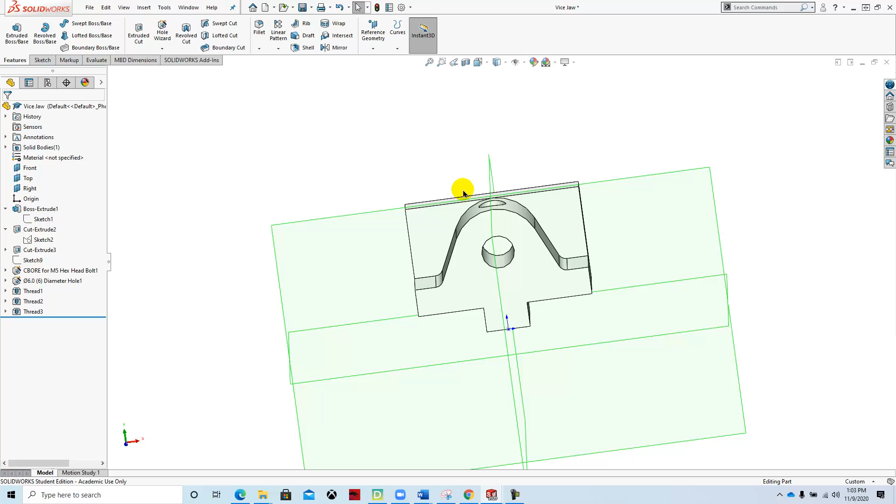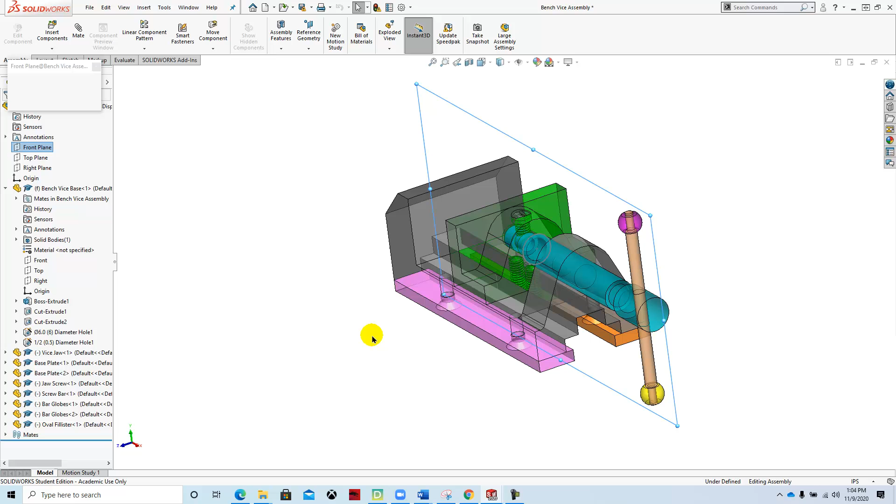We want to try to keep these axes or planes lined up so that when we get into the assembly model, if we take a look at how the planes are set up, you can see the part is modeled right down the center. That's one of the reasons manufacturers like SolidWorks so much, it has these design intents which allow designers to make things as perfect as possible.

If we look at how this part was created, we can use what I call the wayback bar. It's this bar right here, and you'll see that if you hover over it, it turns into a little hand. If you pull that hand up through the tree, it'll show you how this part was created.

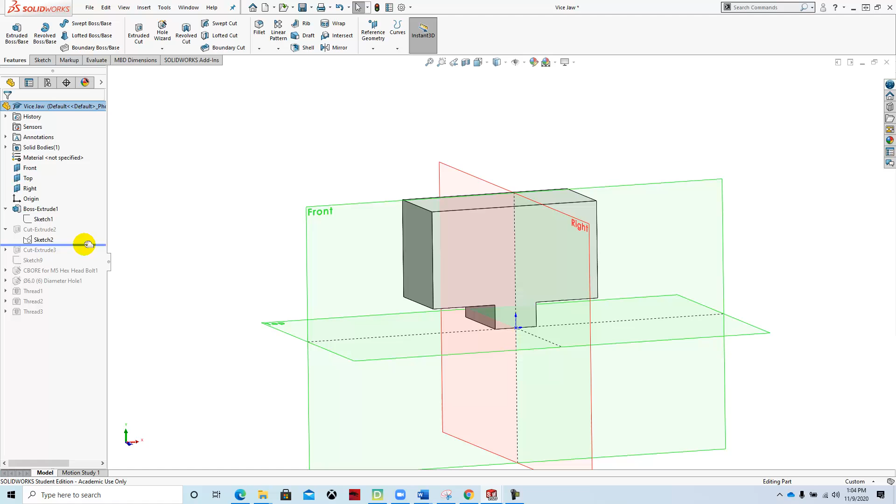It was created from a sketch that was the basic shape of this part, which is 64 millimeters by 36, plus another 9 by 16 for this little part down here. I made a few small changes to it. What I found was that the next step, and I'll talk about those changes as we get to them, is to model this component.

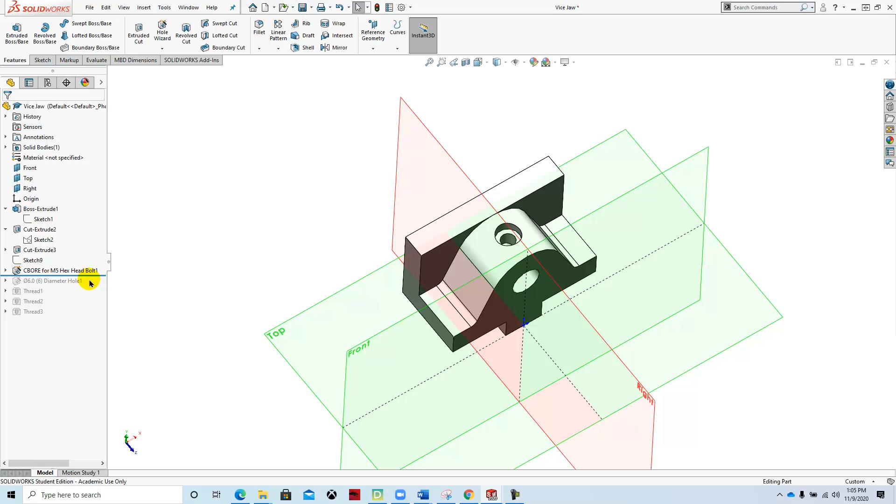You can see we modeled this feature right here and cut it, then the hole here, the counterbore with the M5 hex head bolt, and then the 6 millimeter cutout here.

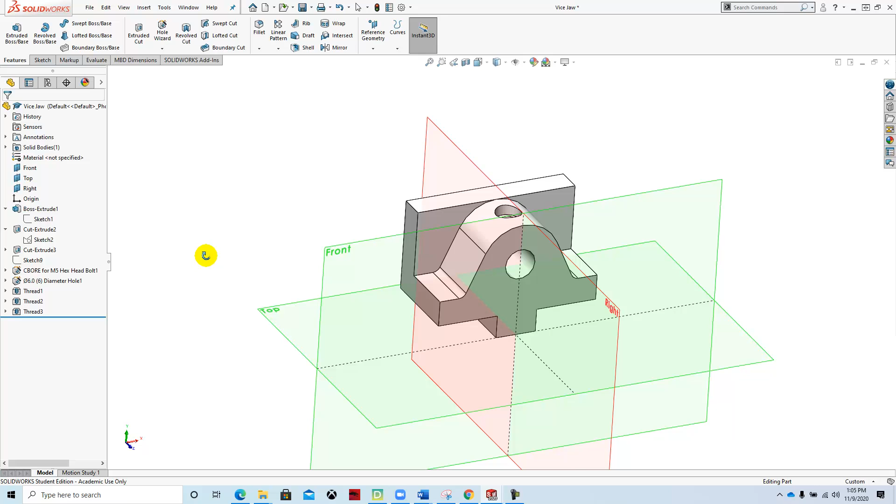Then I tweaked this a little bit by threading this with a 1/4-20 tap. Now, if I was going to manufacture this, I would use millimeters, but it's hard for me to get metric fasteners. It's a lot easier for me to go down to Ace Hardware and get a standard imperial size, so I just made these 1/4-20 for our purposes.

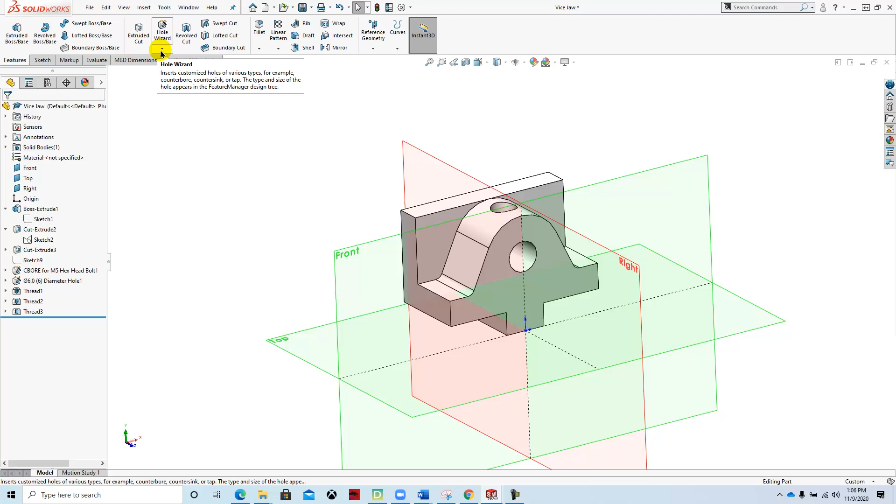I also put two threaded holes on the bottom here that were 1/4-20, because if we create it according to the way the curriculum was written, we'd have to use self-tapping screws. We could do that, but since we have this hole wizard now, or I think they should call it the thread wizard, we can see how the 3D printed threads will work.

Okay, so that's how this part was created. Let's get started and make that part.

If we take a look at the blueprints here, we can start off on the front plane with a sketch, and we're going to sketch this basic 64 by 36 shape with this 16 by 9 little T down here at the bottom.

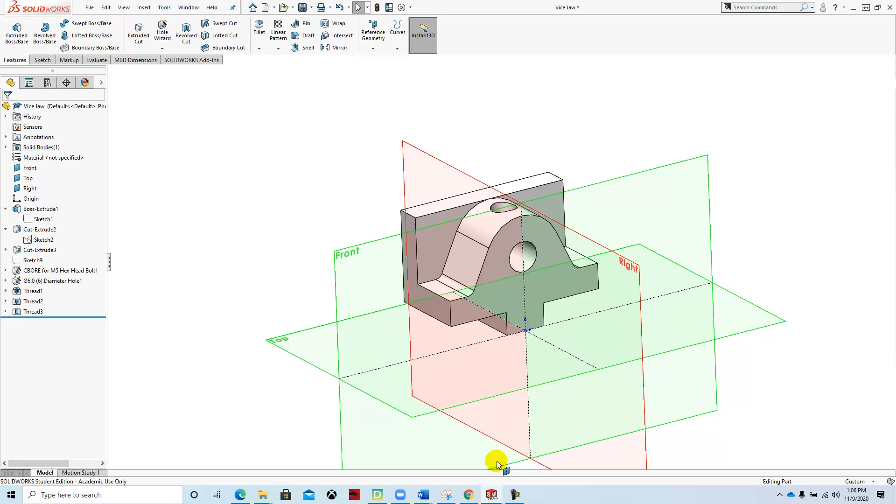Switching back to SolidWorks: File, New, Part. Front plane, start a sketch. We're going to model it on the front plane, and when we model that, we're going to model it right along the center line, so we're going to create a center line.

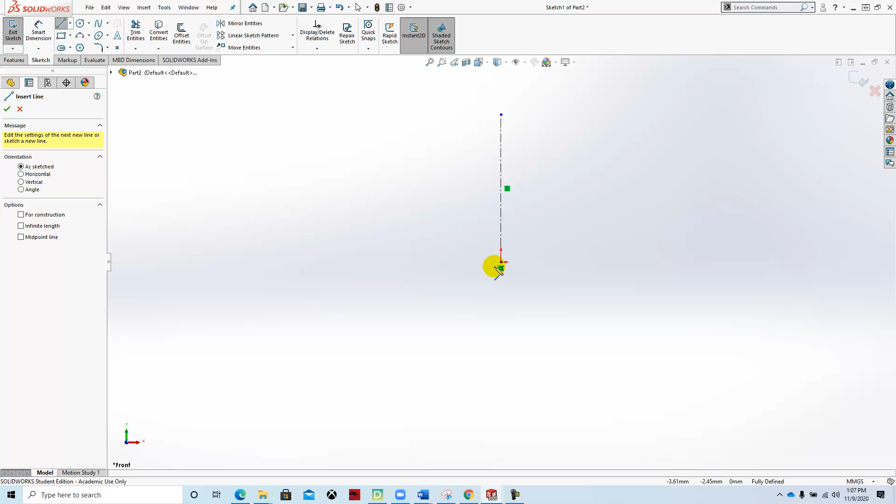Now, I forgot to make the units millimeters, so I'm going to switch that over to metric, and then we're going to continue the sketch. Sometimes it likes to be difficult. So I'm going to create half of it, and then I'm going to mirror it, because SolidWorks likes symmetrical relationships.

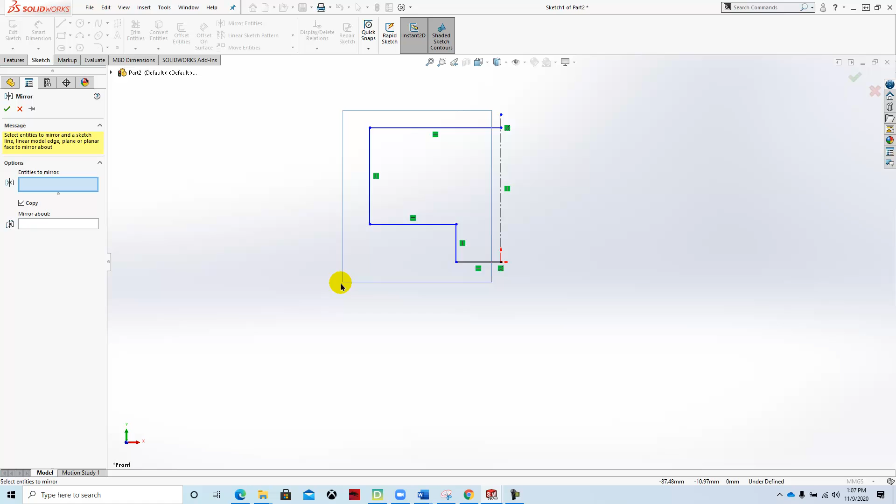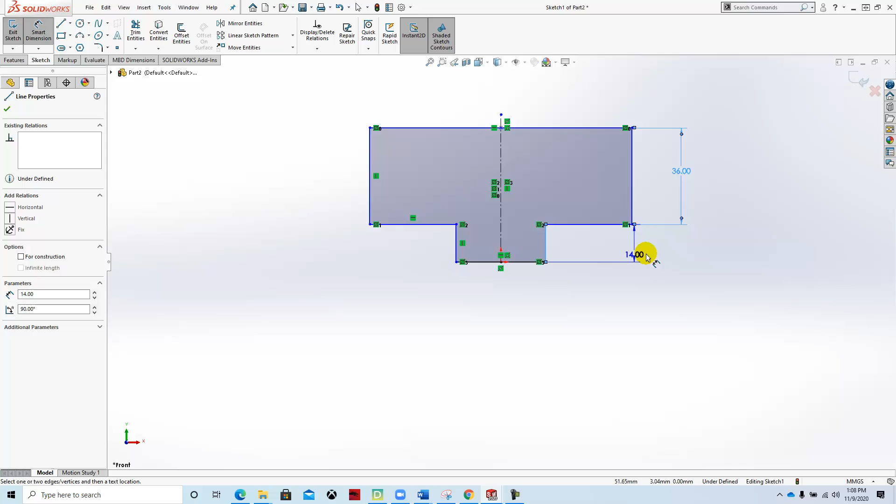Then I'm going to start to define my dimensions: 36, 9, 16, and 64.

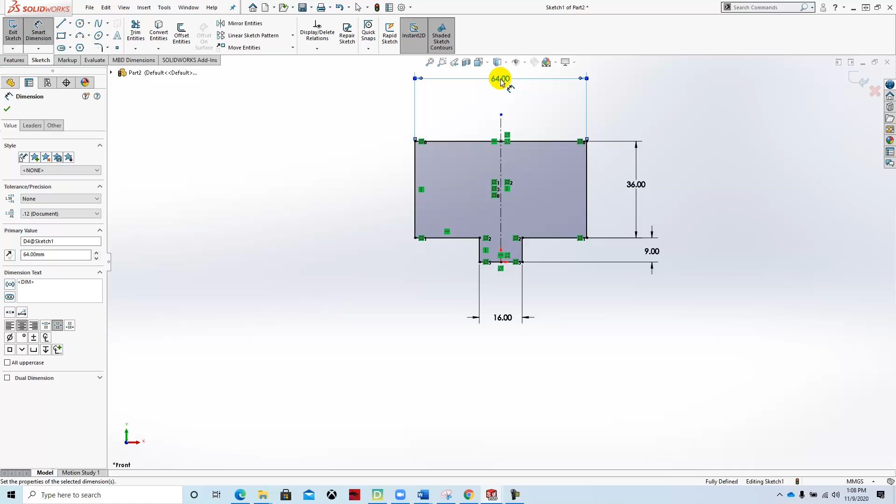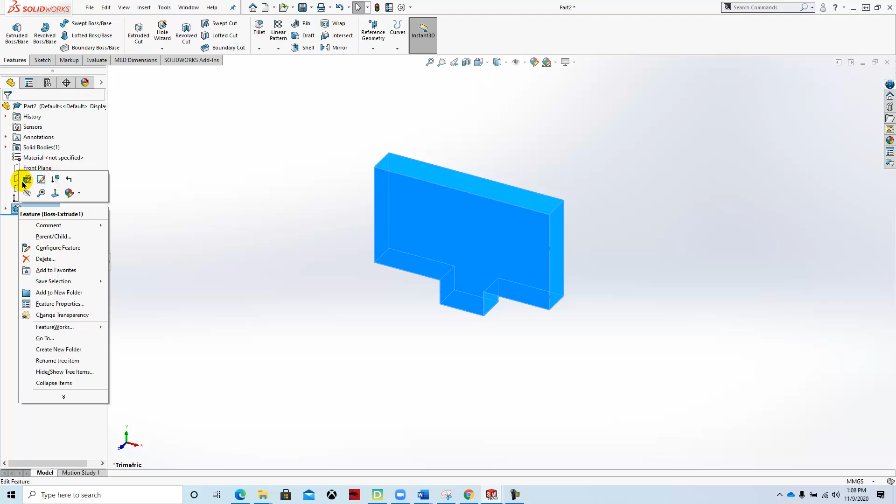We're going to extrude that sketch, keeping the face of the part in the front, and extrude it at a distance of 32 millimeters. Something happened there, so I'm going to edit the feature... 32. There we go.

All right, so that's the first part. Next, we're going to sketch on this face here and create this shape right here. Again, we're going to create a symmetrical shape which we're going to mirror, drawing half of it, mirroring it, and then subtracting this part here and this part here.

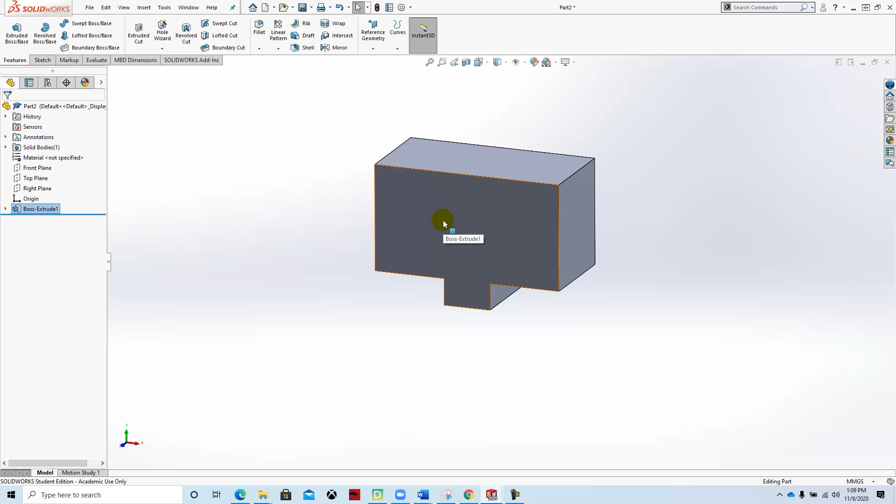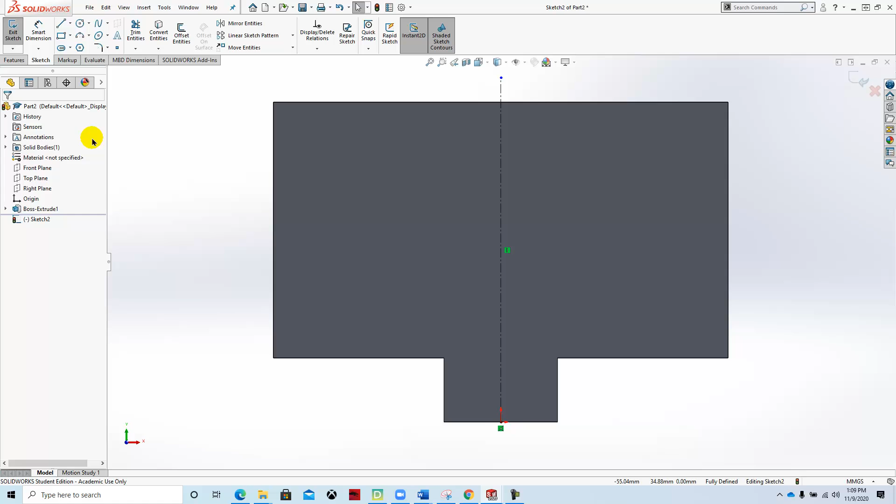Click on the face, select sketch, space bar, normal to. Sketch, construction line, vertical right up the center. Circle from here to this point. I'm not sure why it doesn't... there we go, to that point right there. That's going to be a 16 millimeter radius.

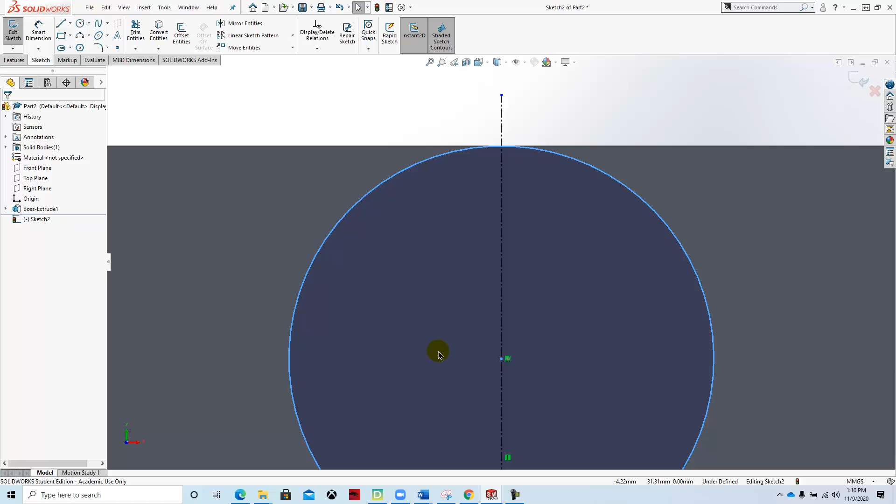Or 32 diameter. I'm not sure why it's fighting me today, but it's not unusual. So what I want to do is add a relation to keep that component tangent with that part.

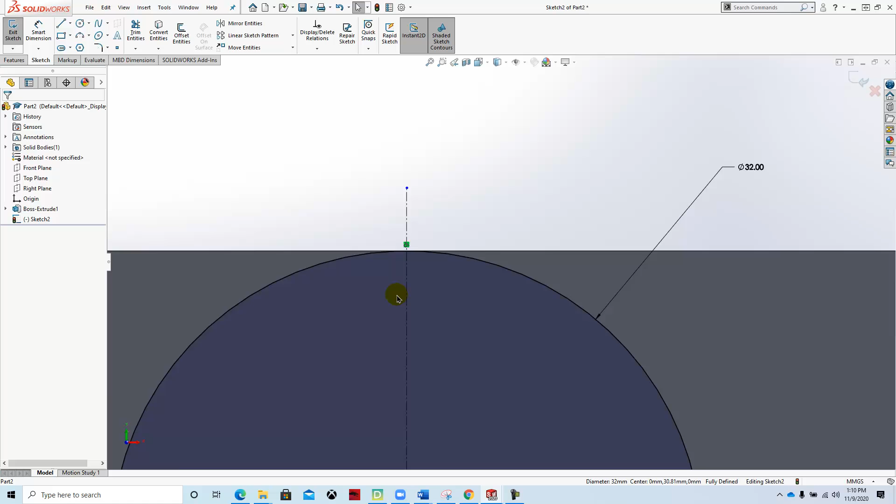So what I'm going to do is see if I can add a relationship here between this and this, and I'm going to say tangent. However you do that, it's fine, but we do want that geometry set like that.

We'll put another line here on the side. It should be horizontal. And then we'll set that at, we'll trim that. Whoops.

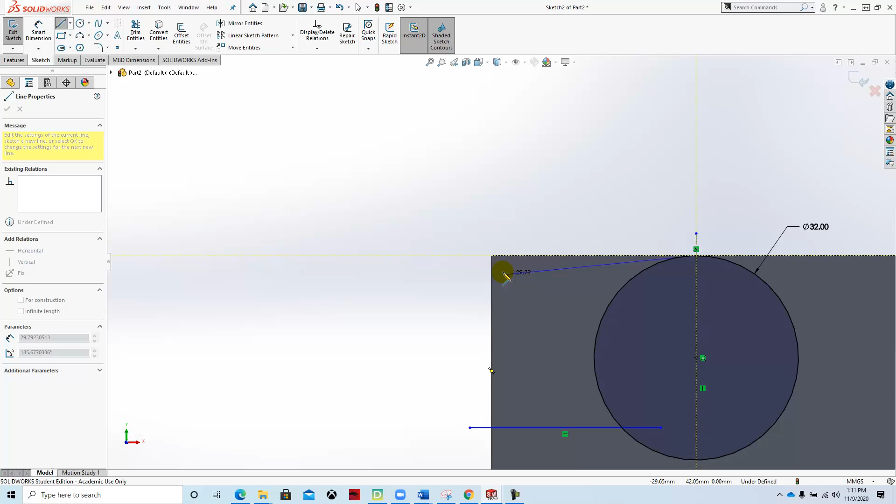I need a line that goes around the perimeter. So I want a line from here to here to here. Now I can trim.

Define this line here, which is going to be, oops, from about here, and then I want a tangent relationship here. So I want it to find the tangency point.

And Solidworks is pretty smart, so I'm going to figure that's going to work. And then I'm going to put in that fillet of 3 millimeters right here.

And I'm going to define this at 10 millimeters from here to here.

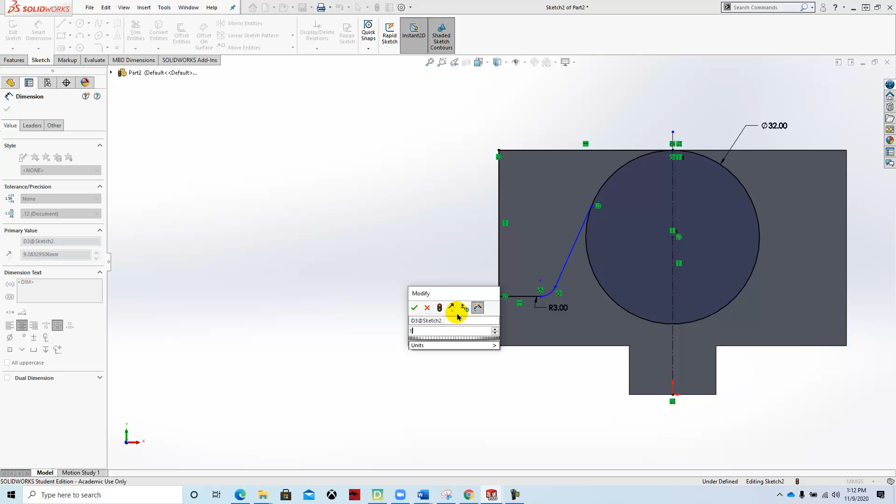Now the part's not fully defined. What I could do here is to trim it and then to see what's involved to fully define it.

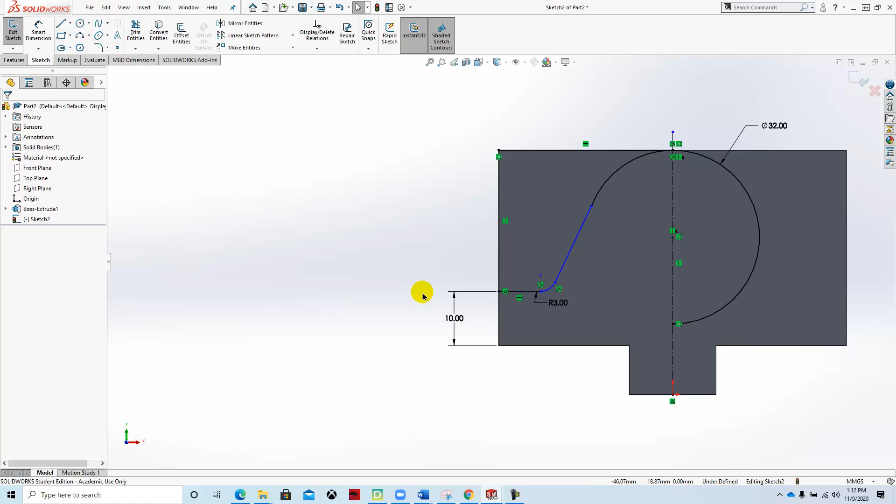I think it wants, and this doesn't look tangent, it looks a little off, and so something happened here. So let's make sure that we add that relation by clicking on this line and say tangent.

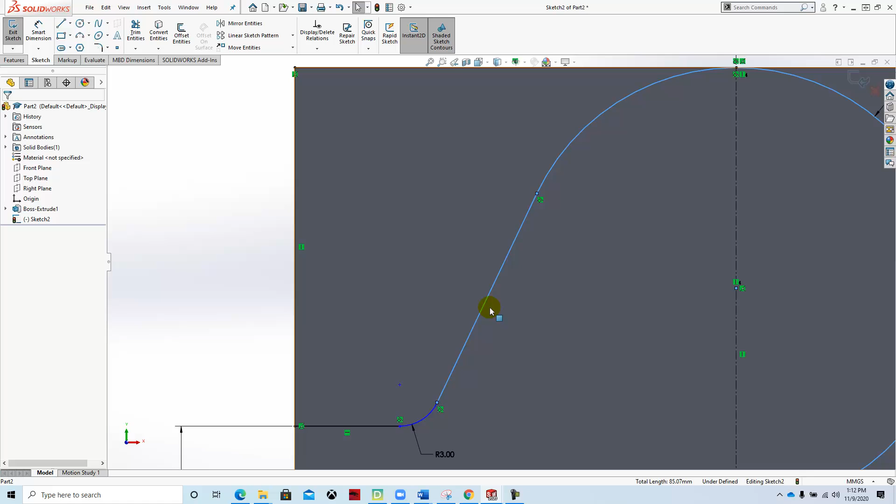And then check to make sure that those lines are endpoint to endpoint. Sometimes you'll have the line kind of cross over. So that looks great. And then I'm going to mirror this.

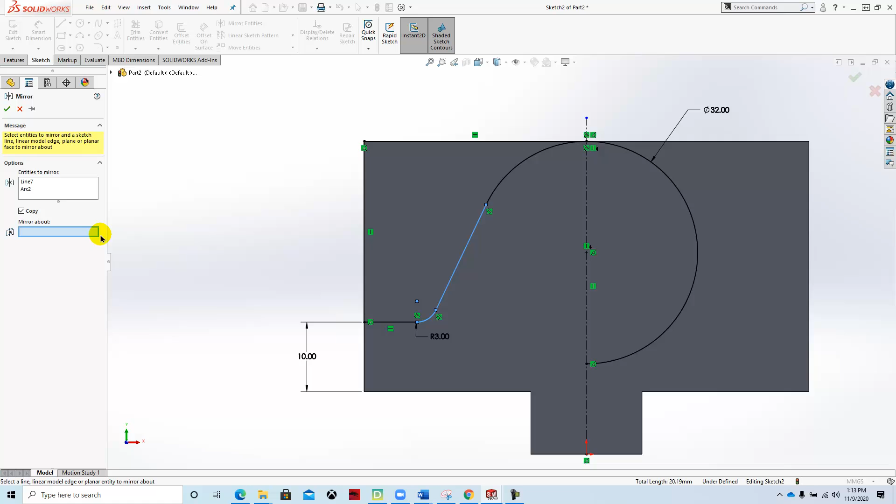About my center line, and I missed one line. And I missed two more lines. So let's get these two.

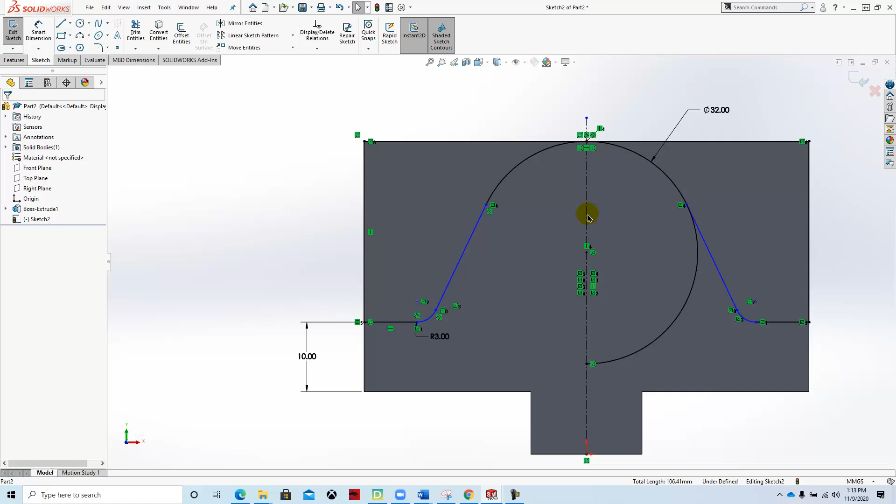And then I'm going to trim. Going to check this area right here. And it doesn't seem to want to bring over that relationship.

So what I'm going to do is add it again, because you can see there's a tangent relation and it's not on this part. So we say add relation, click on this line and this line, and then say tangent.

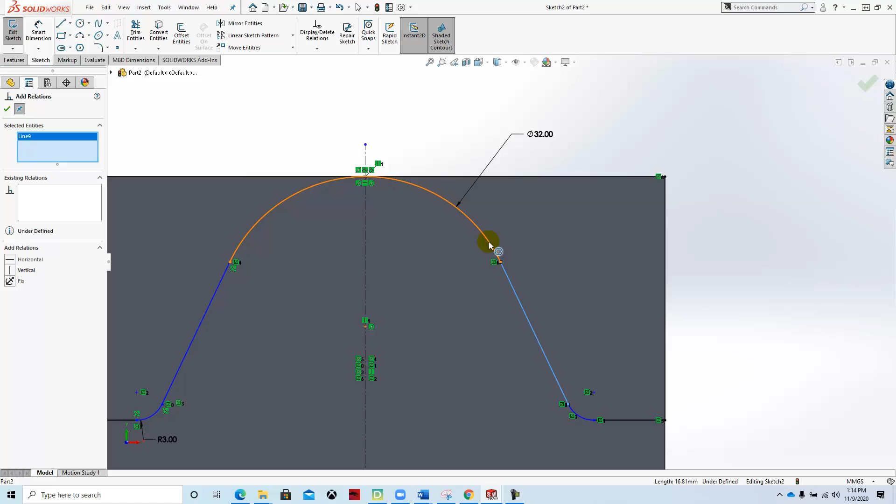Okay, so we still have some blue lines that we want to figure out why it's not fully defined.

Sometimes you can just go in, and we might be able to fix it by going from the origin to this point, and just go with whatever number that it gives you, and I'll say okay.

And so that seemed to be the problem. It likes to know where it is in relation to the origin. Next thing I'm going to do is save it before I go too far.

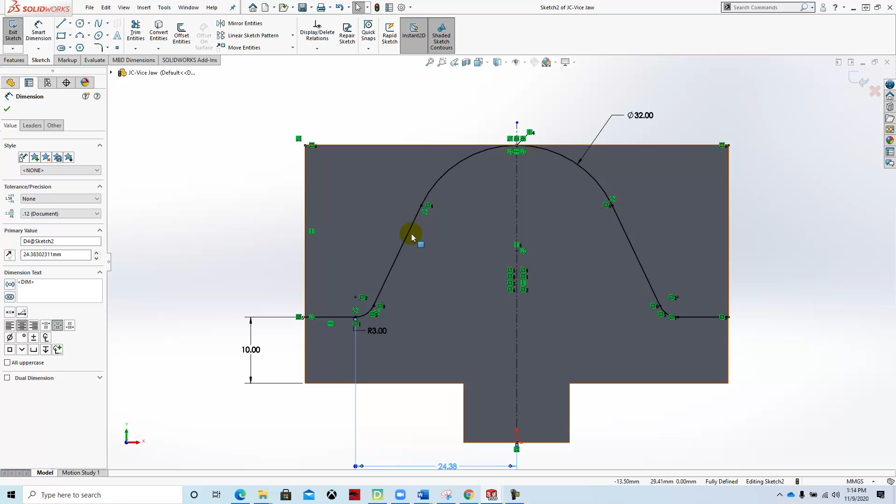And then I'm going to extrude cut. So I'm going to say features, extrude cut.

I'm going to select the contour right here and right here, so 1 and 2, and I'm going to extrude cut those a distance of 32 minus 10, or 22 millimeters.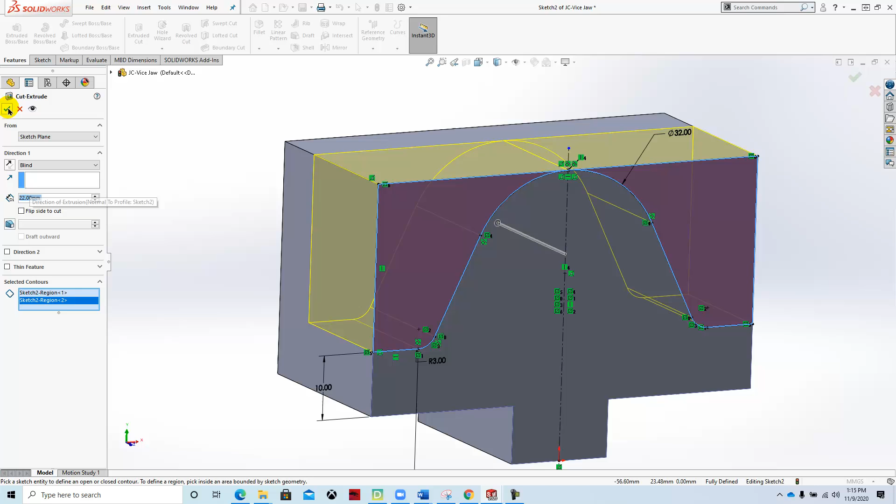Green check mark. All right, looks good. Next thing we're going to do is start another sketch, and we're going to create the hole feature right here.

We're going to need to do the hole feature on the top, which we will probably need a plane for, and the two holes on the bottom we'll use Hole Wizard for.

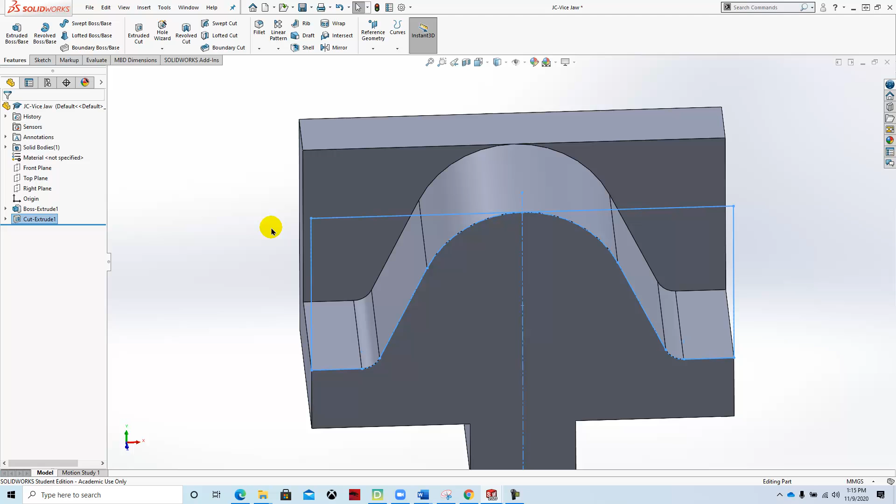Okay, so let's do the easy one first. Let's do this 12 millimeter, 24 millimeter deep circular cutout.

And when you look at this, read the prints. So in the front view you see the hole, and then in the side view you'll see the dotted lines that show how that hole is set. And you'll notice that it doesn't have the little cones on it.

When you start to work with CAD, you need to start to learn about the tools that are making the parts. Now, since we're 3D printing this is no problem. You can 3D print flat holes on the bottom, but you can't drill holes without a point.

And so hole geometry for typical high speed drills is 118 degrees as an FYI. We'll talk about that more as we progress in the course. Okay, so as we look at that, we're going to create that 12 millimeter hole, 24 deep.

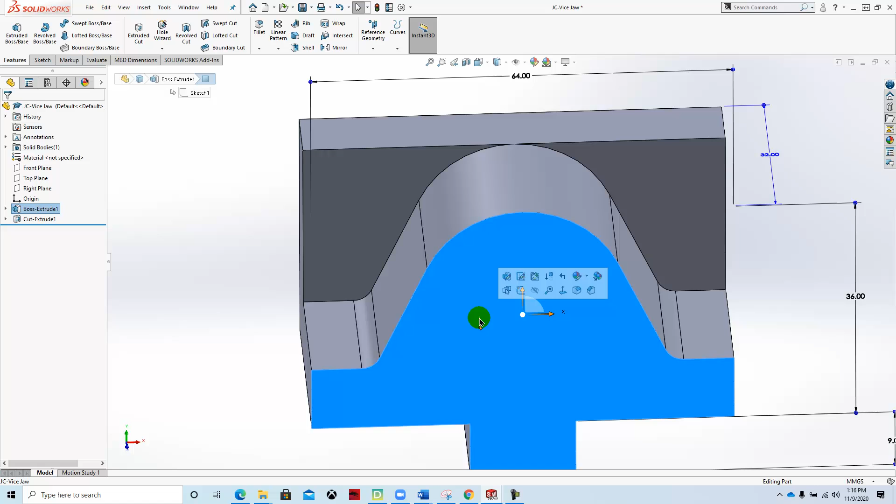Click on this face, start a sketch, space bar, normal to, sketch. Wake up the center by hovering around the edge, and then it should be smart enough to find the center.

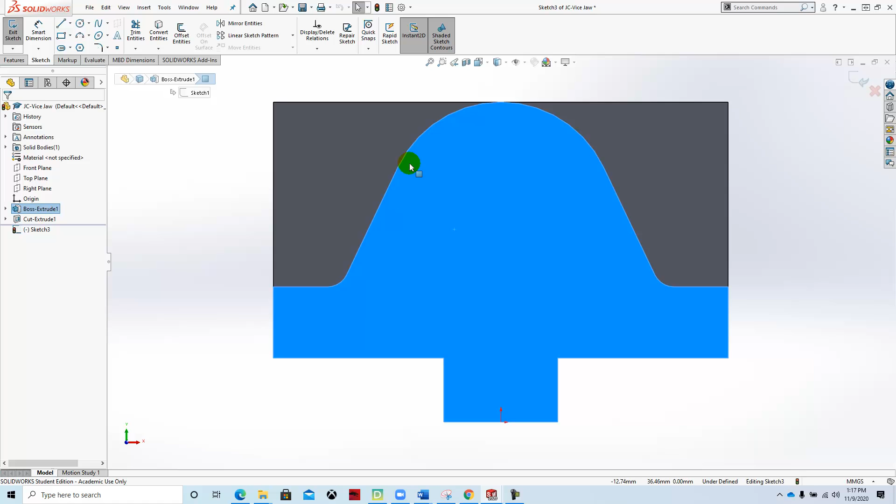And again, it seems to be Monday for me today, so I'm not so happy with it, but let's go throw a center line in, see if that makes it happy. Try it again. We're going to try to wake this up. And there it is.

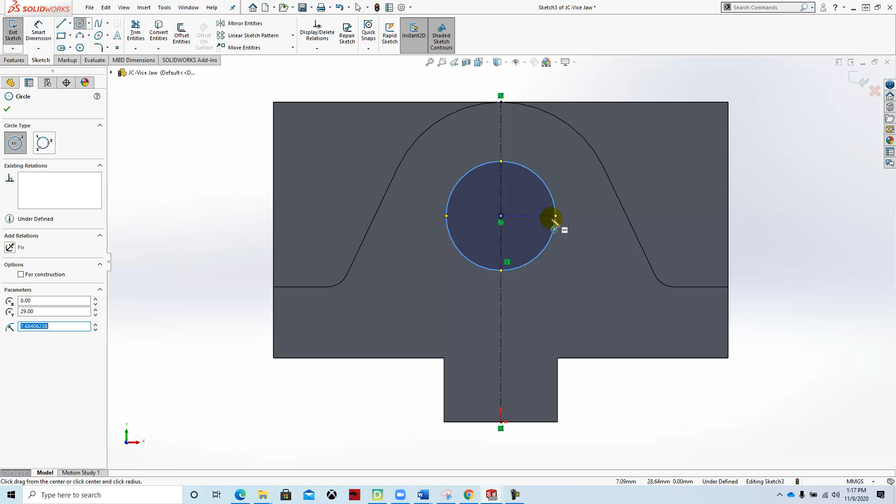And we're going to make that 12 millimeters. Now, while it's sketching, you can come over here on the side and you can kind of preemptively say 6 for the radius and green check mark it. And then when you put in the smart dimension, it'll go right to that value.

We're going to extrude cut.

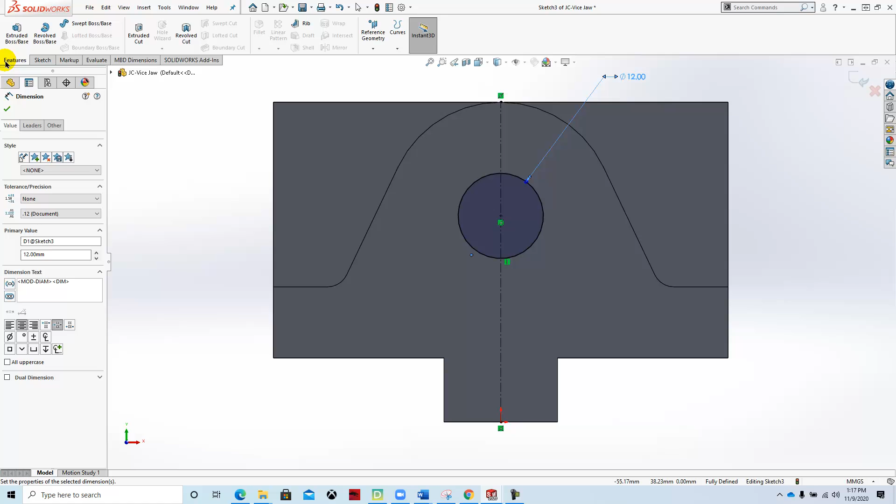24 millimeters. Then we're going to work on the bottom. On the bottom here, we're going to use Hole Wizard, and we're going to locate these two holes that are on the bottom, and I'm going to use 1/4-20 holes, 1/4 inch meaning 0.250, 20 meaning 20 threads per inch, or 20 of those ridges.

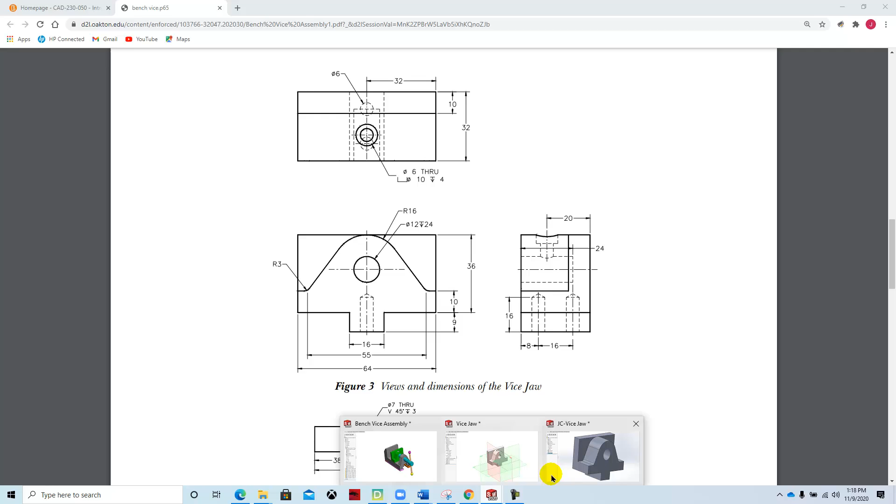To use the Hole Wizard, we're going to select Hole Wizard, and then put in that information. I'm going to say inches, ANSI, American National Standards Institute, and then we're going to say we want a threaded hole, and we're going to make that 1/4, and then the depth on that hole is going to be 16 millimeters.

It's not a bad idea to add a slight counterbore to that. We'll come back to that.

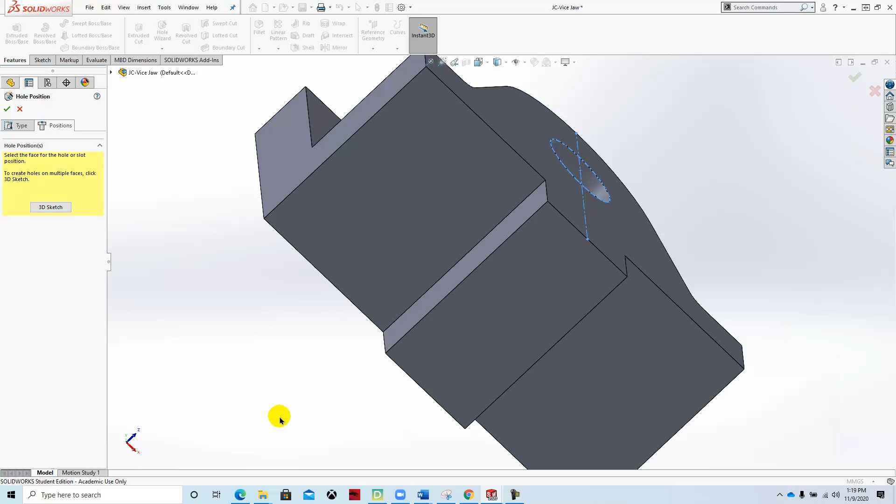So once you have the hole information defined, you click on the Positions tab, and then you click here, and then you locate that. What I'm going to do is see if I can grab that and track it a little bit. It's a little tough. I'm going to hit space bar, see if I can go normal to, try it again.

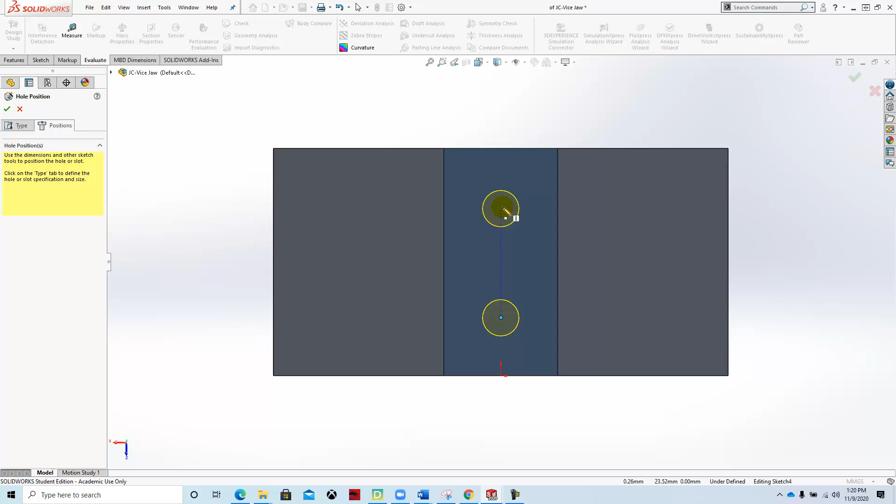There we go. I'm going to put one here, and then track another one right here. I'm going to add a green check mark, and then... I guess I ended it too soon. Let me right click and go back to editing that. What I want to do is go back to my positions and locate those, and they're going to be located 8 millimeters and 16 millimeters respectively.

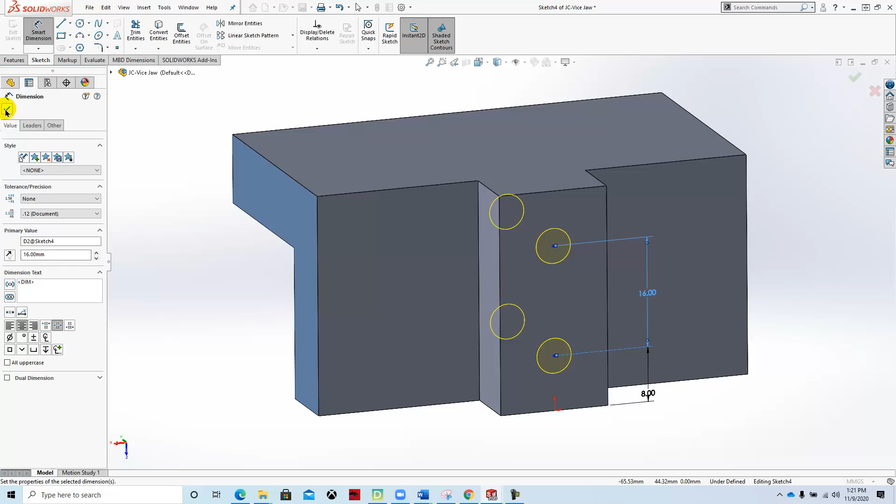So we'll come here with Smart Dimension, and we'll say from here to here, 8, and then from here to here, 16, and green check mark, and check mark. There we go.

Now it's got a simplified thread representation. We can go into some of the SolidWorks settings and it'll put a bitmap of a threaded feature in there if we want to. When you use the Hole Wizard, it doesn't actually cut the holes in it, and I should have thought about that before I made the video. So that's one way to do it.

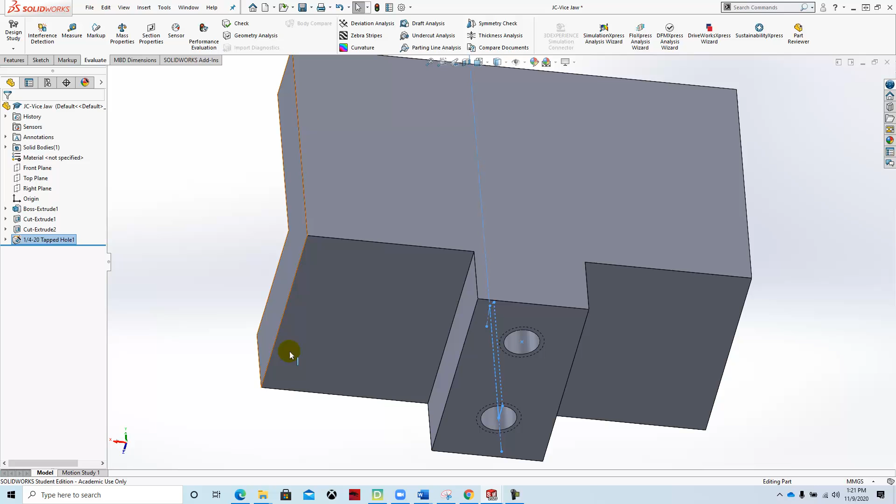Another way to do that would be to use the features and create those holes with what I'm just going to call the Thread Wizard. So let's take a look at that. I'm going to undo that. That doesn't want to undo it. Let's just leave that for this point right now.

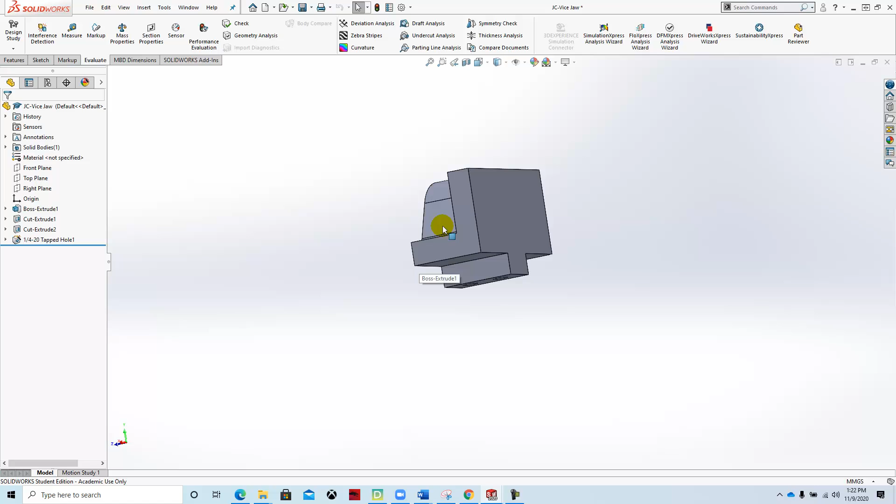Okay, so we have another hole to put in the top. What I'm going to do is show the top plane by right-clicking on it and clicking the eyeball there. Then I'm going to hold the Control key and drag this plane up. What I really want is for it to be right at that point where it's tangent to it. So I'm just going to do a calculation on that, and that's going to be 36 plus 9, 45. So the distance, 44—I'm going to say 45, enter, green check mark.

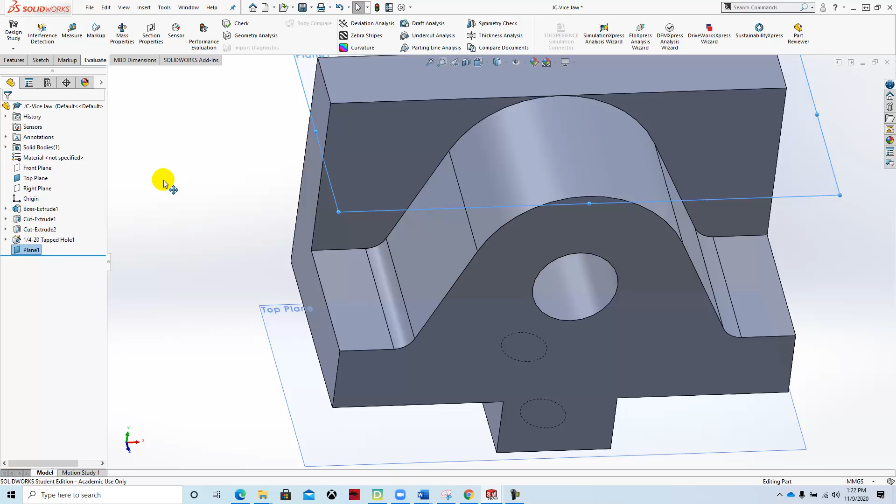And so I have a plane there. I'm going to start a sketch on that plane by right-clicking on it, start a sketch, space bar, normal to, and then I'm going to draw a center line down the center of the part, and then create this feature here on the top. We're going to make it—I'm just going to stick with the way that it's here.

I can use Hole Wizard to create those features. You're welcome to go ahead and use the Thread Wizard to actually cut those threads. But when we get ready to 3D print it, I can tweak those settings as we go into the modeling. Or we just buy some taps and dies from Harbor Freight and work the parts, which is how you do that type of work when you're working with metal anyway.

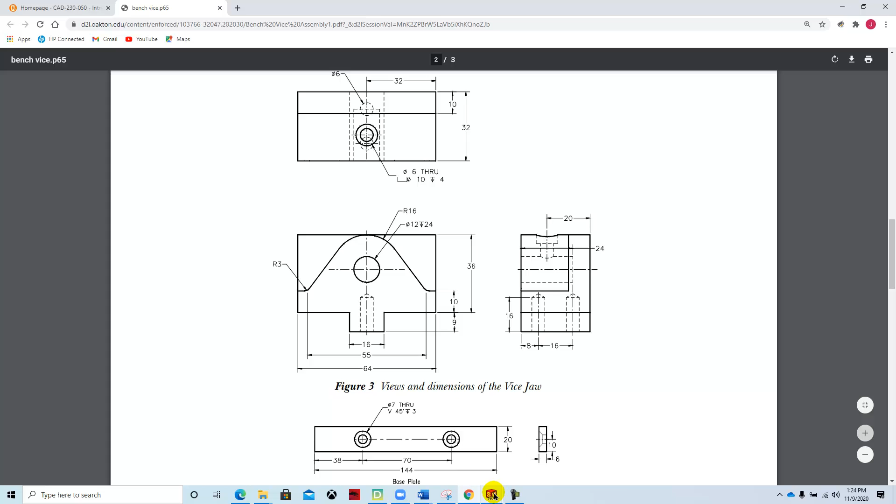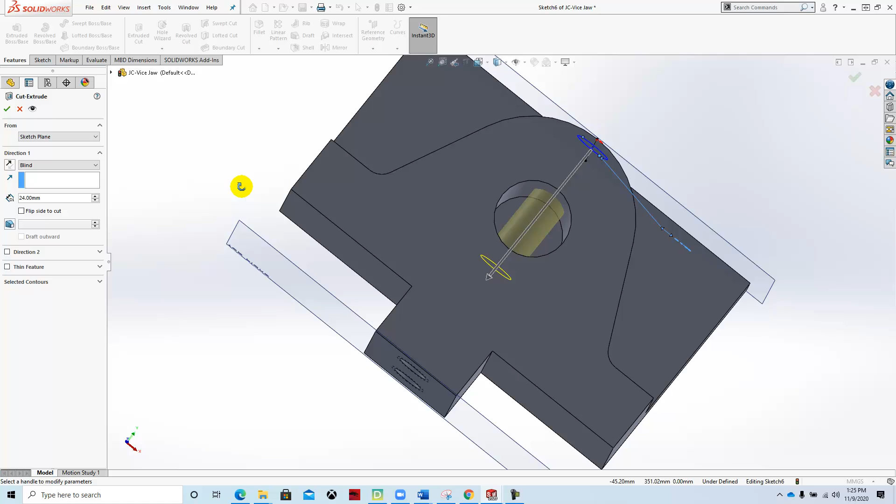And I'll extrude cut that hole up to next, and then I'll do the same for the counterbore, which will be 10 millimeters, 4 millimeters deep.

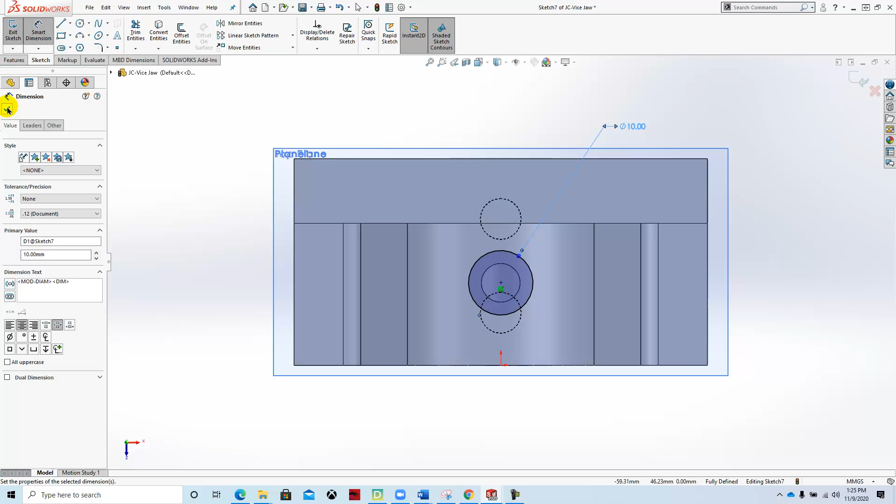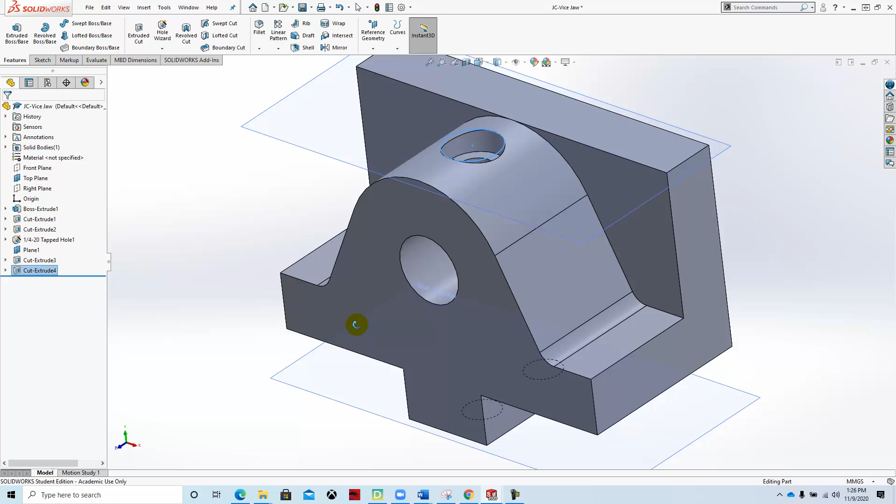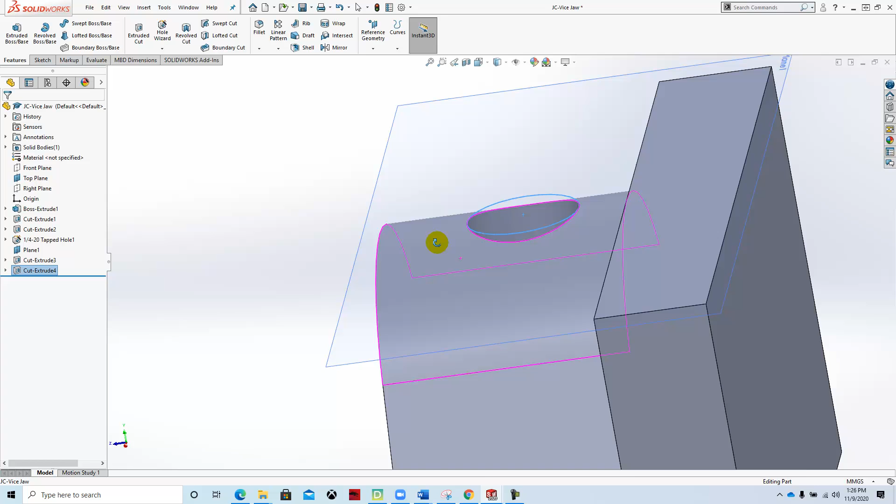Features, extrude cut. And the depth will be 4 millimeters. If we wanted to add a thread component to this, we're just going to go ahead and use a tap or a die. And it looks like maybe what I'll have to do is just get a set of metric taps. Okay, so that completes the model for the vice jaw.

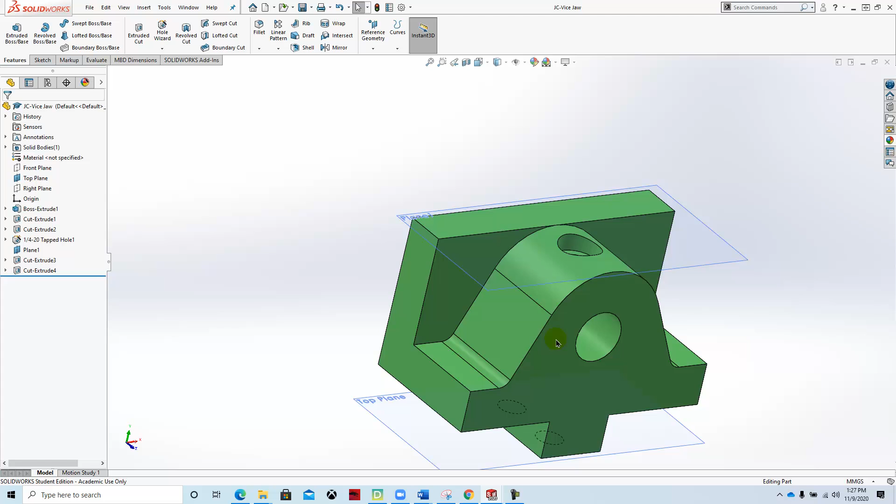To make it look nice, if we want to, you can grab the beach ball here and just choose a color for it. Be sure to save your part. And that's it. Okay, that ends this video.